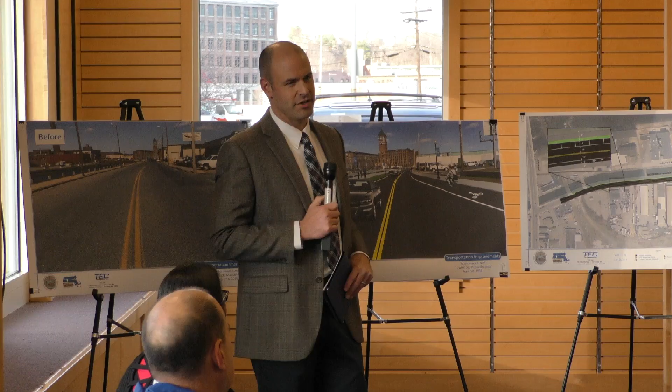My name is Jonathan Rockwell. I'm a professional engineer and Transportation Engineering Services Manager with TEC, the design consultant to the city on this project. I'm here with Jake Carmody, who's a project manager on the project as well.

The design we're going to present tonight is currently at relatively early stages, about the 25% design level, more or less. The idea tonight is to present the project to you, give you the opportunity to provide feedback, ask questions, and hopefully we can explain the project to you, the goals of the project, and the benefits of the project.

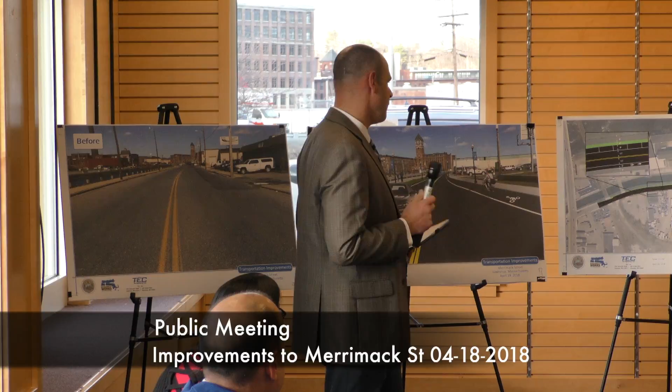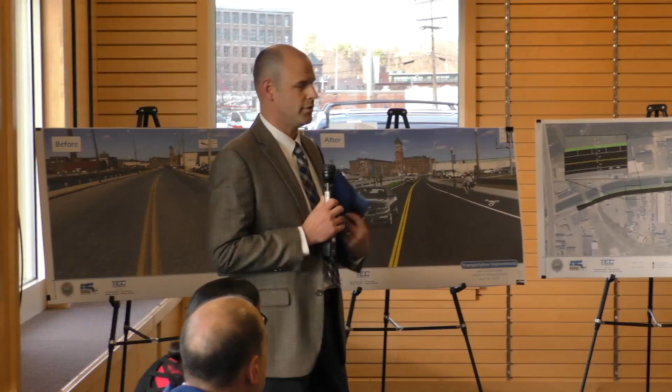The primary goals of the project are to upgrade the accommodations for all users of the corridor along Merrimack Street between South Union and Broadway - that's the vehicles and drivers, pedestrians using the sidewalks and pedestrian crossings, and bicyclists that may be up and down the corridor. We also want to improve safety for those users, which is paramount in addition to improving accommodations.

The second goal is really to maximize the use of the available right-of-way along the corridor, expanding the scope of the project to the extent we can, extending the benefits of the project within the available funding that the mayor mentioned, from the MassWorks grant program - the $3 million fund granted to the city.

The third primary goal is to balance those first two goals with the needs of the abutting commercial and industrial property owners along here, maintaining the current business operations that they have today to the extent that can be done, while still meeting the first two goals.

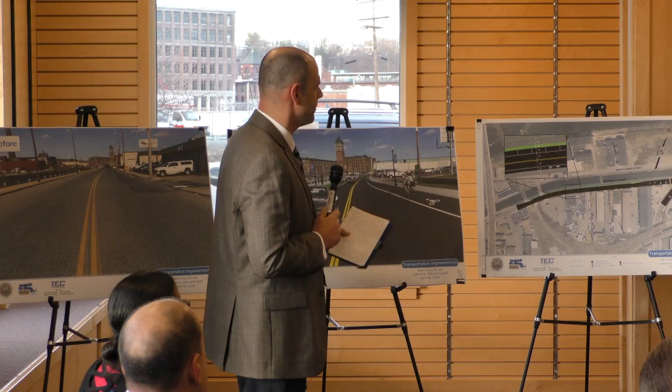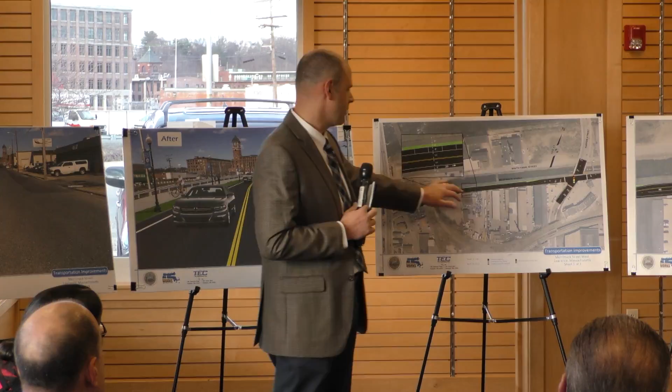The project begins just east of Broadway. The typical section in this segment would consist of a 7-foot sidewalk on the south side of the roadway - a little wider than the minimum required to allow accommodation for the utility poles along there - providing a 5-foot bicycle lane eastbound, 2 through travel lanes, and an 8-foot parking lane through this segment.

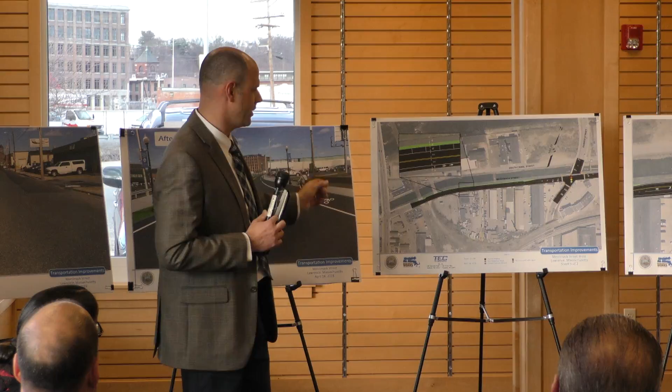Beyond the parking lane, there's a vertical curb similar to today, but with a grass buffer. Then along the canal, we're proposing an 8-foot shared use path, which allows both bicycles and pedestrians to use the path bidirectionally, in both directions on Merrimack Street, along the canal side.

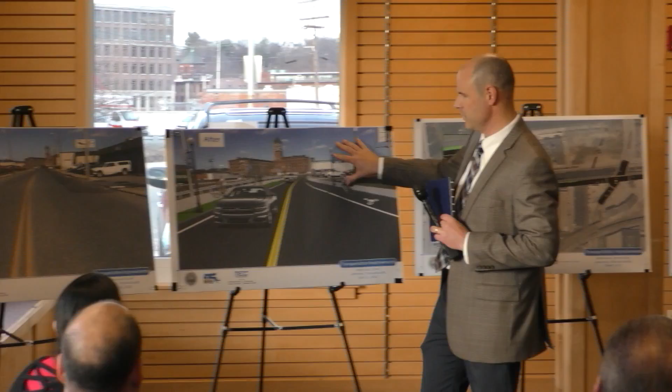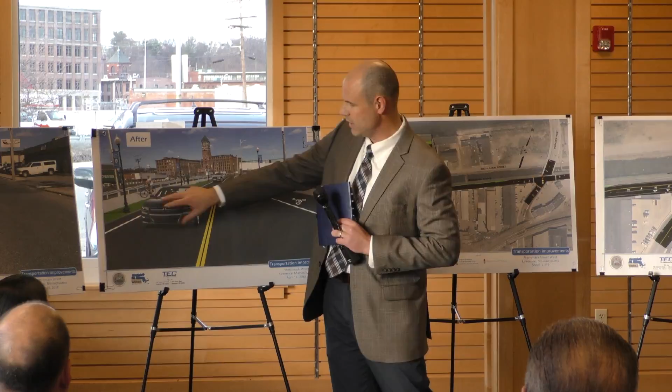The views you see here are intended to give you a visualization of this first segment of the corridor between Broadway and Parker Street - a before photo looking to the east, and a rendering of what the post-construction condition might look like, with the sidewalk, street lighting, bicycle lane, grass buffer with lighting on this side, and the wider shared use path along the canal.

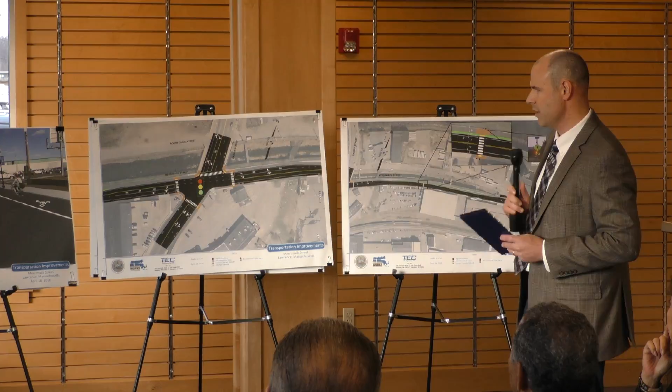Now, focusing on the intersection of Parker Street itself, you can see that as you approach Parker Street, the grass buffer I spoke of before and the parking lane have now been eliminated to allow for the accommodation of a left turn lane to Parker Street.

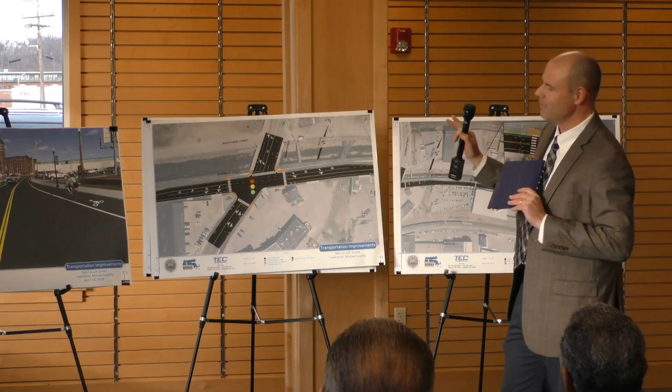Also, zooming in here, you see the intersection of Parker Street historically and more recently has been designated as a high crash location within the state. That high crash designation means it's within the top 5% of signalized intersections within the region. So it's in that top 5%, very high crash rate.

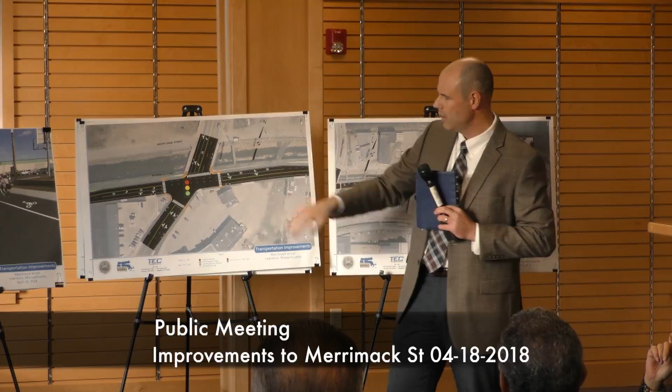So the measures we're looking at to address that safety issue are reconstruction of the traffic signal, including new pedestrian signals around the intersection. That new traffic signal equipment will allow for more efficient and safe operations, allowing for an exclusive left turn phase, which means coming off of Parker Street, a vehicle in the left turn lane will get a green arrow and have no opposing movements and be able to make that move.

Similarly, on westbound Merrimack Street, the traffic signal will provide that same operation where someone turning left onto Parker Street will have that protected movement.

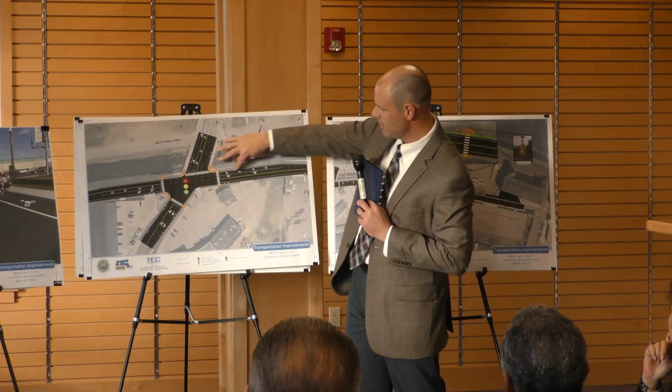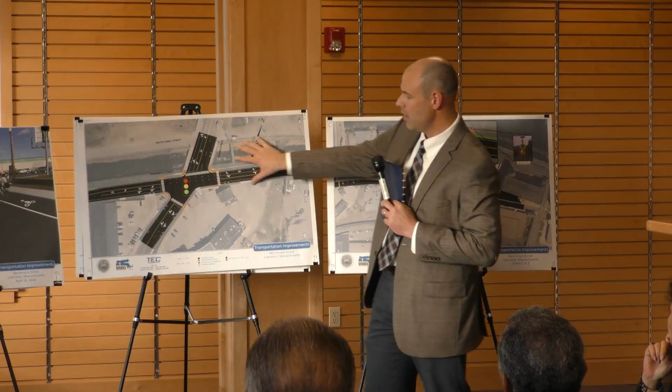And then also on Merrimack Street eastbound, we're formalizing and delineating the turn lanes a little better, so this will be designated as an exclusive right turn lane to Parker Street. On Parker Street, restriping and formalizing that two-lane approach. Around the intersection, all the pedestrian accommodations, those curb ramps, will be reconstructed to bring those up to ADA compliance.

As we now begin to move further east down the corridor past Parker Street, we're introducing a different typical section, where along the south side of the roadway is a slightly narrower sidewalk. The reason for that is in this segment of the corridor, there's more of a constrained right-of-way. There's less right-of-way that the city owns, less property the city owns to accommodate the lanes, the sidewalks, the bike lanes, et cetera. So on this side, the 5.5-foot sidewalk.

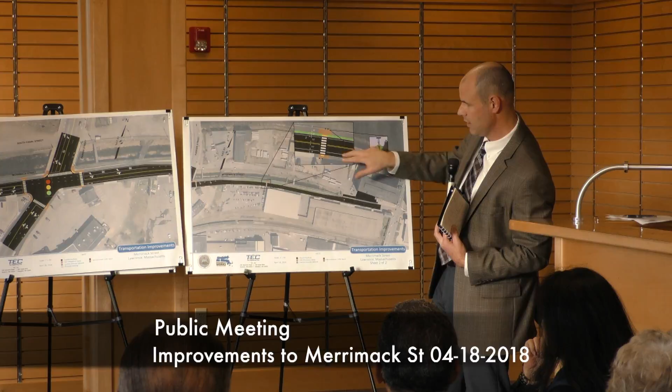Similarly, the 5-foot bike lane continues along the entire corridor along this side, with 2 through travel lanes. And then along the canal, there's a narrower shoulder, and then again a grass buffer, and then the continuation of that 8-foot shared use path.

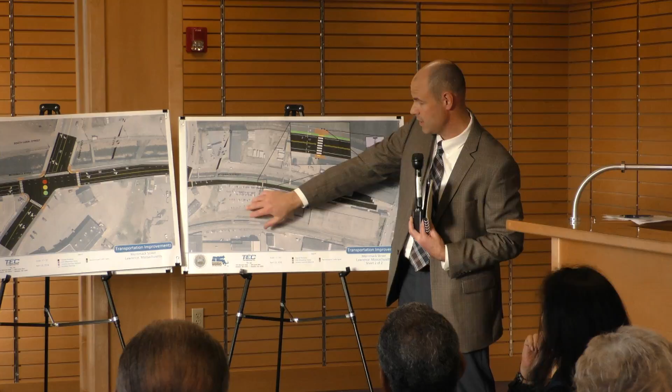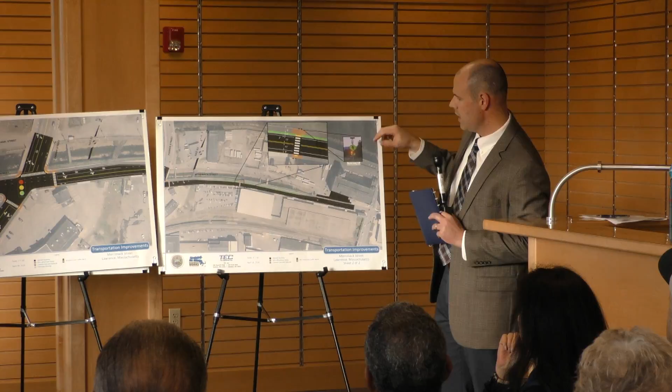Now here, this zoomed in view is looking at the current location of the pedestrian crossing from the New Balance parking area, Lot C, to the north side of the roadway. This crossing will be upgraded with high visibility crosswalk markings, new curb ramps, again bringing those up to ADA compliance, and then the installation of what we call rectangular rapid flashing beacons.

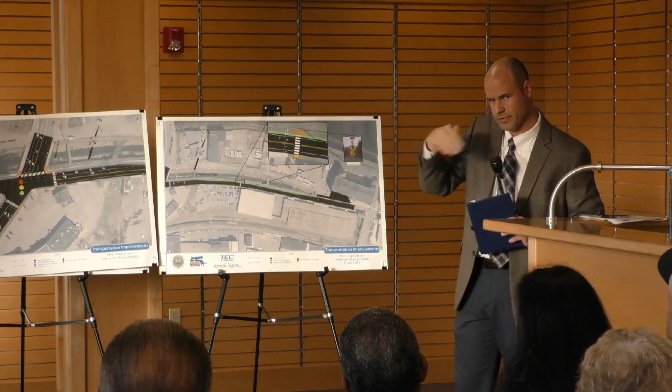So those are the flashing lights that you see on the east side, on the Riverwalk property, for all those mid-block crossings. That allows the pedestrian to push the button, the lights start flashing for them, alerting vehicles that someone might be in the crosswalk. They make the crossing safely, and then the lights turn off.

Now heading further east, as we approach South Union Street, the pavement begins to transition to allow for a second approach lane to Union Street, matching the existing cross-section that was constructed as part of the first phase of the Merrimack Street improvements on the east side of South Union.

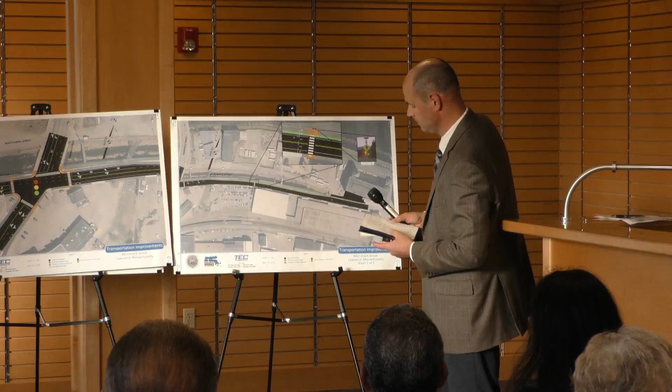So looking down in this segment here, along the New Balance facility as well as the B&D warehousing, we had some initial abutter meetings. Based on those initial abutter meetings, we understand there's a need for some access management.

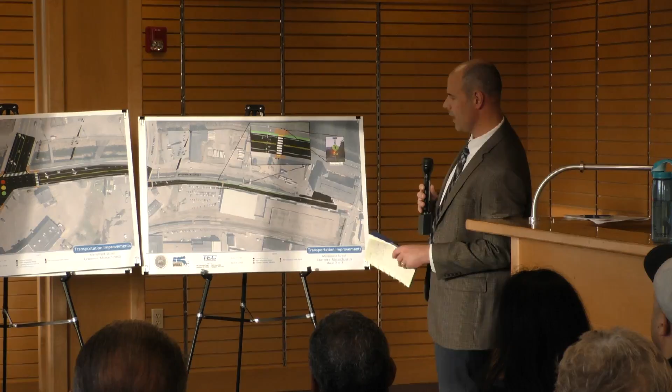To balance the needs of these abutting businesses and their accesses, their delivery operations, balance those needs with the needs of the city to provide adequate pedestrian accommodations and enhanced bicycle accommodations.

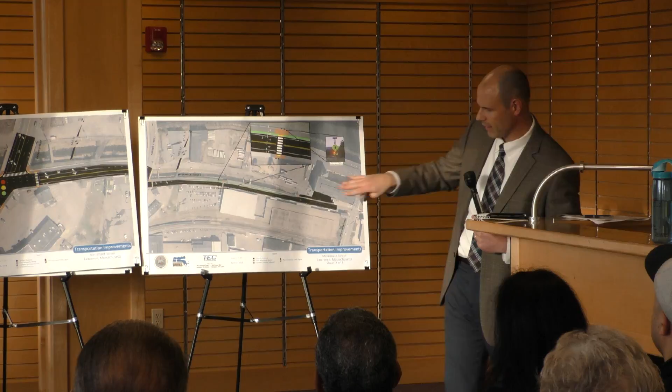So what we're envisioning in this vicinity are a number of larger, strategically placed curb cuts to allow the city to utilize its existing right-of-way through this area, but still allow the business operations to function similarly and comparably to how they do today, backing in their vehicles parallel to the building.

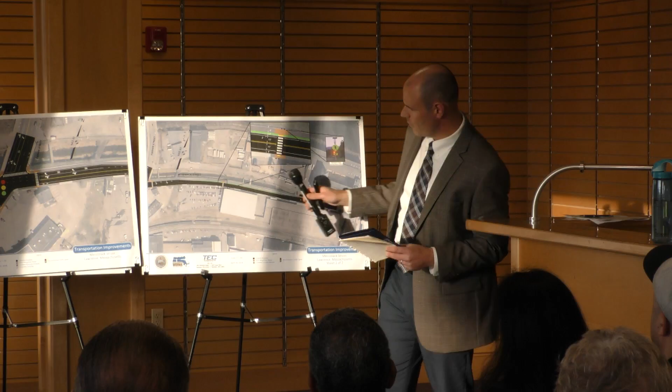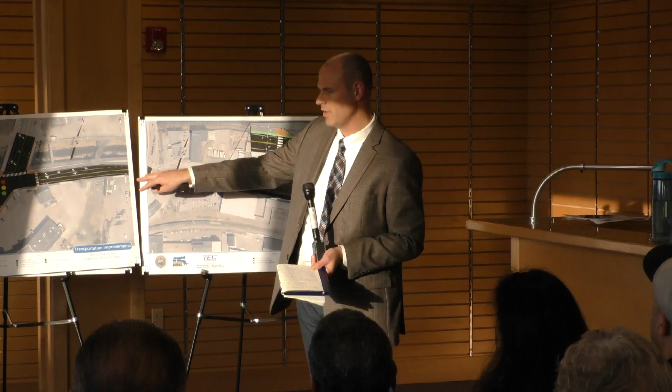Now looking throughout the entire corridor, the project will also provide provisions for ornamental street lighting, similar to what you see on the east side. That's ideally on both sides of the roadway through here, all the way from South Union to the limit of the project just prior to Broadway.

Also looking at drainage system modifications. Given that the curb line isn't really shifting very much in either direction, the drainage system modifications that are required are relatively minimal.

There'll be some utility pole relocations that are necessary, primarily west of Parker Street. And then we'll also be introducing, or looking for opportunities to introduce, street trees where they're feasible.

For example, where there are wider sections of the grass buffer, that may be an opportunity to provide some street trees, presuming that those are within the budget remaining from the MassWorks grant after the other improvements are designed.

Looking ahead to the next steps for the project in terms of design and on to construction: the 75% design we're looking to formalize and finalize hopefully by the end of May. At that point, we'll be meeting with the city to review that design, discussing any necessary potential easements or rights of entry that may be required for temporary grading of adjacent driveways and side slopes, et cetera.

Heading into mid to late summer, we'd be looking to finalize the design probably by the end of July, and then prepare bid documents for the city that they can send out for contractors to bid. Looking to solicit bids probably late summer, early fall.

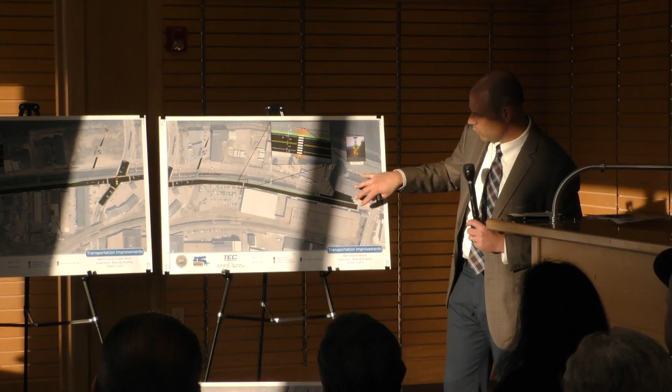Optimistically, if everything goes as planned, we'd hope the contractor could get out here early fall or late fall and start getting in some of the drainage system improvements, underground work for conduit, for lighting, et cetera. But the bulk of the sidewalk work and paving would be happening spring through probably end of June next summer, early summer.

And with that, I guess we'll open it up to any questions that people may have.

Good evening, everyone. My name is Teresa Park, I'm the director of the Office of Planning and Development, and I work with the mayor as well as the planning staff. We have someone here from DPW as well as TEC in developing this project. I know there are a number of folks here who have vested interest in the improvements we just presented to you, so I don't know if you have any specific questions pertaining to what Jonathan just went over that you'd like additional clarification on.

Yes, Betsy. So my question has to do with the bicycle accommodation on the street. My understanding is there's a lot of truck traffic along this corridor because of the businesses here. I like the idea of the multi-use trail on one side. My question is, why even have an on-road bike lane? You could eliminate the bike lane and make the multi-use trail maybe 10 feet, and keep everybody off the road and reduce the conflicts with the trucks.

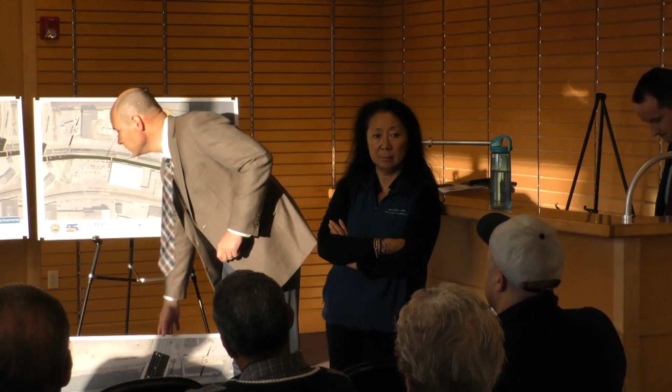I was also concerned when you showed the diagram of this intersection - I'm very close to it - I didn't hear or see the sort of modern striping that would get a cyclist through an intersection like this, which is extremely busy and kind of dangerous for cyclists to get through, and how they would have preferential treatment to safely get through on a bike lane. And likewise, if we're looking at the dual use of this corridor in this city, getting families from other parts of the city down this corridor and up to the trail, they're going to need to get through that intersection safely - how to ensure that cyclists, pedestrians and families can get through there safely and not conflict with trucks and other traffic.

The eastbound bike lane is proposed in recognition of the fact that many eastbound bicyclists are not going to take the time to cross the roadway to get on the shared use path. So it's providing a safe place for them to ride. They still have the option to cross the roadway, either at the future rail trail crossing at Broadway, or a mid-block crossing here, or at South Union, to utilize the shared use path on the other side if they so choose. Many recreational bicyclists may choose to cross the roadway and take the extra time to use the shared use path, but...

Do we have a lot of cyclists riding on this road now? Not an enormous amount. But typically with enhancements such as this, shared use paths, it tends to be one of those 'if you build it, they will come' type of situations.

I'm just wondering, because I think the trend is going to be toward more cycle tracks as opposed to these open bike lanes, especially in an area that has such high volume of truck traffic.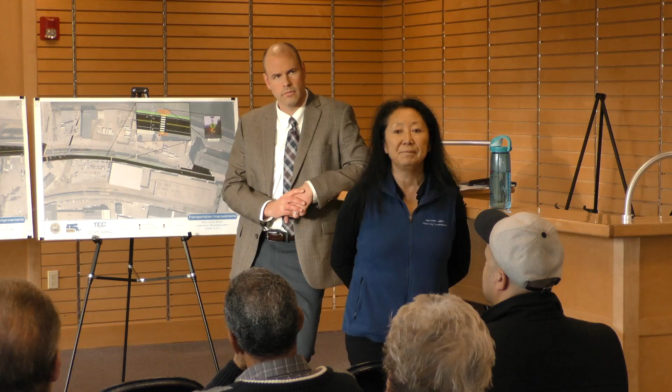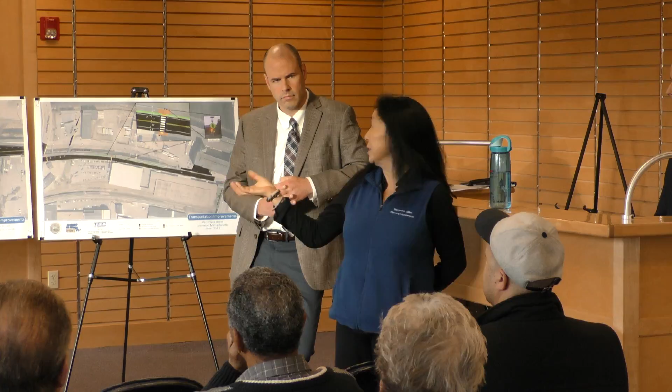As for timing, ideally we'll get the contractor in place this fall to start some of the drainage work and signal work - signal work could go in then. But the bulk of the work you'll see on the roadway will occur next year, probably spring or summer.

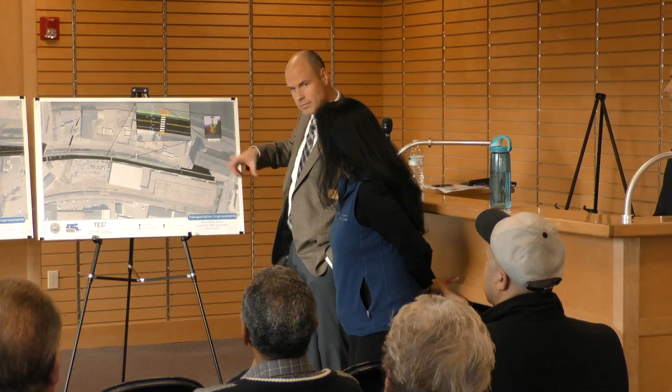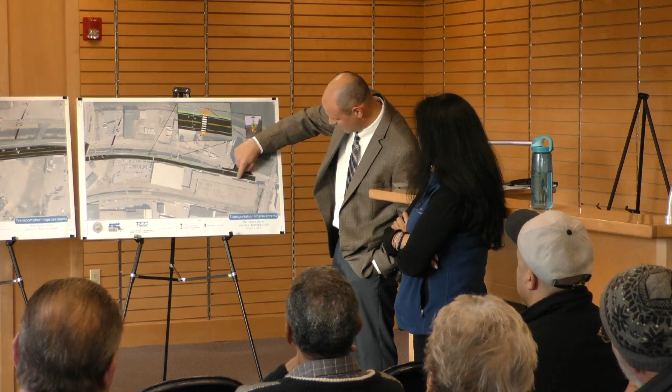Any place you put a sidewalk along that building, you're raising the elevation, am I correct? What is the present street?

Correct, the sidewalk would be raised. What do we do with all the water that now drains across the street because there's no drainage on our side of the street? There'll be provisions for a drainage system to accommodate and collect that drainage. Also, if that sheet flow rises any farther, it runs underneath our building.

Given that the cobbles along your building today are set lower than the pavement elevation, when they did the road 20 years ago, they raised the road up and created basically a nice swimming area. So I think what'll likely have to happen—we haven't gotten into that level of design and three-dimensional modeling to look at the exact grading there—but what's likely to happen is to bring up the cobble elevation. So we're gonna have snow banking out to the street with this design and these curbs.

What do you mean, into the street? When they plow, they usually stay about 4 feet off the curbstones. Presently, at least the last 20 years, there isn't a snowbank on any of that street because we can plow it off. We put curbs, I can't plow. We put signs, I can't plow. So now we're gonna squeeze it right up into all these trucks where they hit the parking. So now we're gonna have a bunch of trucks out on the street in the drive lanes with snowbanks. It'll be more like a lot of the other streets in the city instead of one of the wide open clean ones that we want.

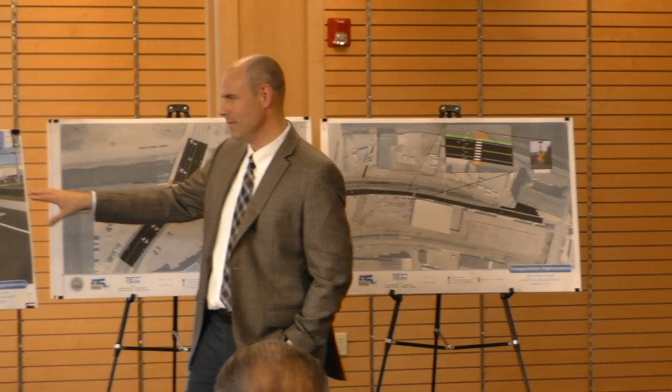The right-of-way constraint out here is a challenge throughout the corridor. For example, along the canal, the city's right-of-way is basically right along the back of this shared-use path, so there's really not much room there to put the light poles. And on the other side of the street, there are utility poles past Parker, along the curb line. So the idea was, from a visual standpoint, to keep them in line with the existing poles.

Councilor, do you have a question? Yes, I wanted to address the parking on the west end. Currently it's both sides on-street parking, and it's been reduced to one side. It's tight, you know, if we were to expand or have employees grow someplace for parking, you're eliminating half of it. How have you thought that through?

Well, you want to start the answer? I mean, from a technical standpoint?

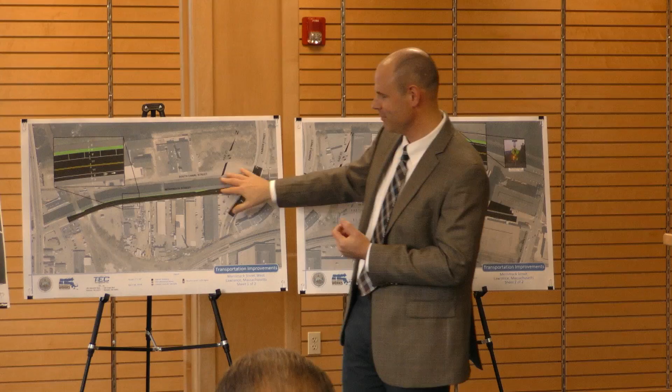Well, again, it goes back to the right-of-way constraint. So the desire here is to provide a sidewalk on one side for pedestrian accommodations and the shared use path on the canal side, consistent with the land use planning study. Shared use paths are supposed to, by standard, have a grass buffer if at all possible. So we've provided the minimum width grass buffer through here. That really leaves very little room to provide that second parking lane on the far side within the right-of-way, not enough to provide that.

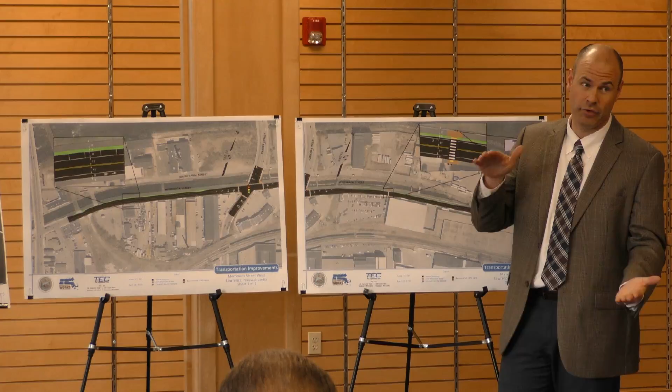So if the city desired to try to provide parking on both sides of the road, there'd have to be some sort of compromise — either we don't provide the shared use path there, or a narrower sidewalk perhaps. There's got to be a give and take in order to provide that parking on both sides.

Just out of curiosity, how many of your employees frequently park on the south side? Most of my employees are parking in the middle of the alleyway, but if it were to expand, there's no place to park. In all honesty, one of the things we've heard — we've had a chance to talk to some of the property owners here, not everyone, but some of them.

What we've heard is they actually like the fact that there was no parking on the south side, because it was impacting visibility as they're coming in and out of their property, among a number of other things. So they actually liked it.

Well, there's a lot of congestion with class in the morning and in the afternoon. It's a tough stretch of the street there with traffic being blocked.

I mean, they were one of the organizations we talked to, but they weren't the only ones. They're taking over the parking spaces for the rest of the building that he's in, and so there is no parking.

I'm just like, yeah. So your building is literally right on the other side. They share the lot. Yeah. I come at 3 o'clock in the afternoon and see massive congestion on that stretch of the street.

Mornings and afternoons, yeah, it's trouble. The street's blocked for at least a block or two in the morning. So I don't see any use there — in the morning, you want a bicycle lane, a pedestrian lane.

Yeah, because of the traffic that will be there, people will be waiting.